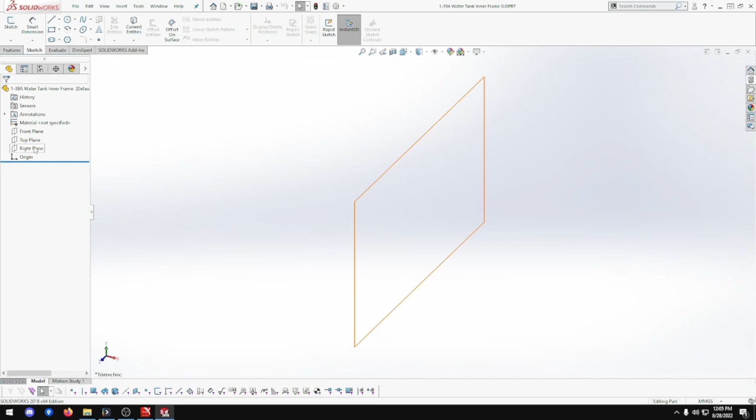So let's do right. There we want, start there, do that one. We're just going to do one first, then we'll mirror the rest. That's going to be 12.

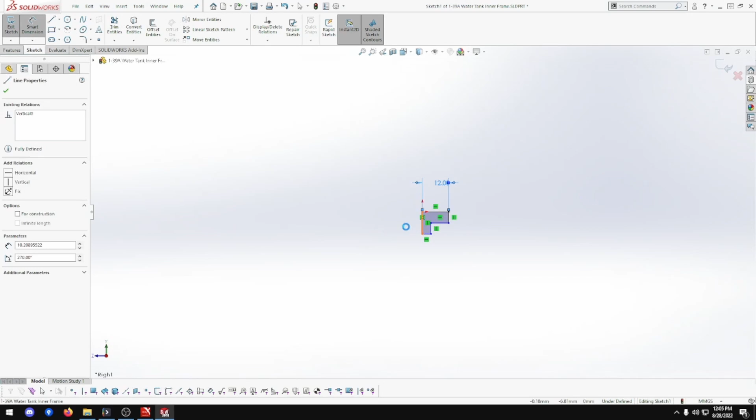By 12. Let's zoom in a bit. This is going to be 3 thick, and that's going to be 3 thick. Okay, that's cool. Now we want to mirror entities.

Let's do the same. Oh, that's terrible. Join those two together, beautiful. And again, this one. And this one.

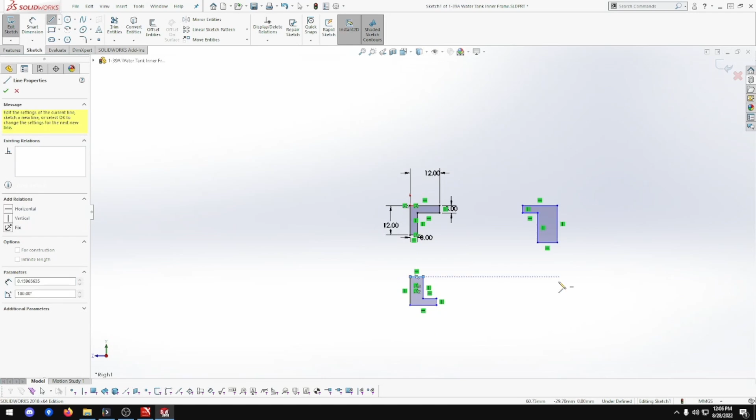Again, there's so many ways you can do this. If you really want to, you can do the pieces individually, then join them together. That works fine too, but I'm just going to do this as one piece.

So now we want that one, and that dot. Those 2 points are going to be horizontal. These 2 points here are going to be vertical. These 2 are going to be vertical, and these 2 are going to be horizontal.

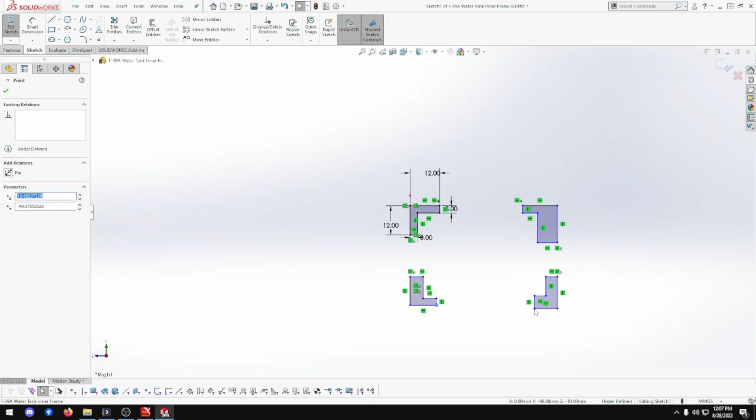Okay, let's just zoom in a bit, make it easier. There we go. Tighten this up a little bit, just makes it a bit easier. Move that 3 out there, beautiful. Okay, just to make it less measurements. There we go. So that's locked that one in now.

That's gonna lock that one in, beautiful. Let's do this one. Won't lock it in, but I just need to measure 1 spot, and that'll be done. There we go. Okay, so actually hold on, we do that one, there we go, and this one, and this one, there we go.

Let's measure on the opposite side, this one, and see what areas we need to adjust. 3, that is 12, and that is 12. Okay, so we still need measurements across. That's fine. So maybe that's got to lock in.

Oh, there was what we missed. And that one there, beautiful. Let's lock it in. Yes, I still need to move that way. That's fine. Lock those 2 in. That's going to be vertical. Always say the wrong one.

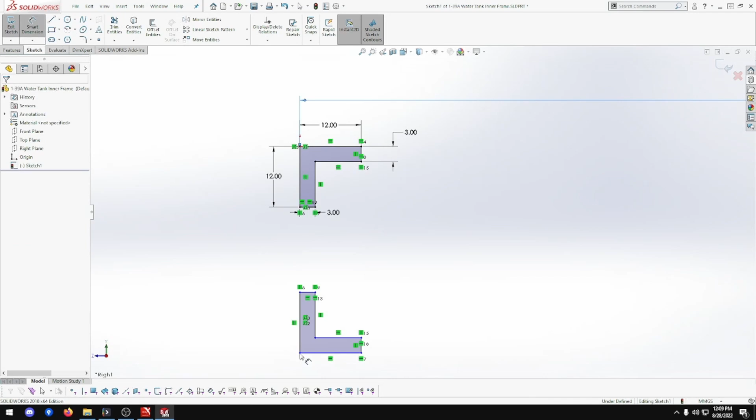Try again. Yeah, I had 1 point highlighted still, so that's why I went like that. 250. Yeah, smart dimension, yeah, everything should be.

Oop, wrong way. So that's all black, so that's locked in. That's all black, that's locked in. That's all black, that's locked in. Excellent. Okay, don't worry about the mess of those lines, you won't see them later.

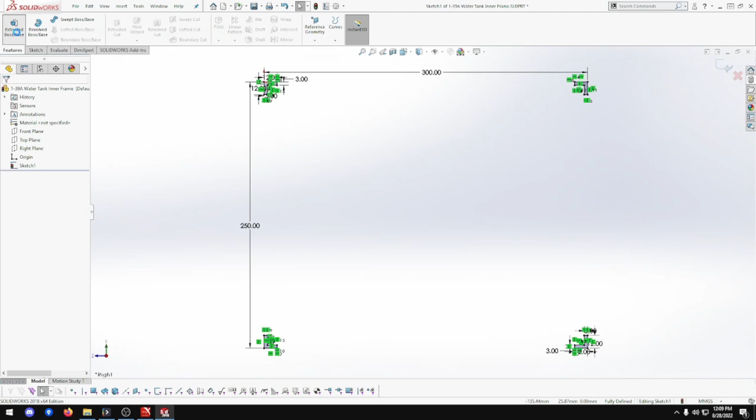So now we want feature, extrude, mid-plane, and that's going to be a total of 585. And done. There you go. That's our first 4 bars.

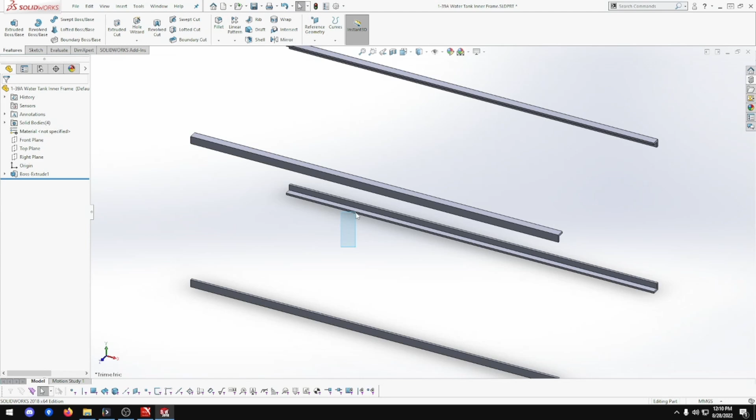Now we need to build one at this end. We need to build one at this end. So I'm just thinking - so yeah, if we build 4, 2 there, it's exactly the same as what we've done, but going that way, and that should be everything done then. So let me, what am I, normal to, that's what I'm after.

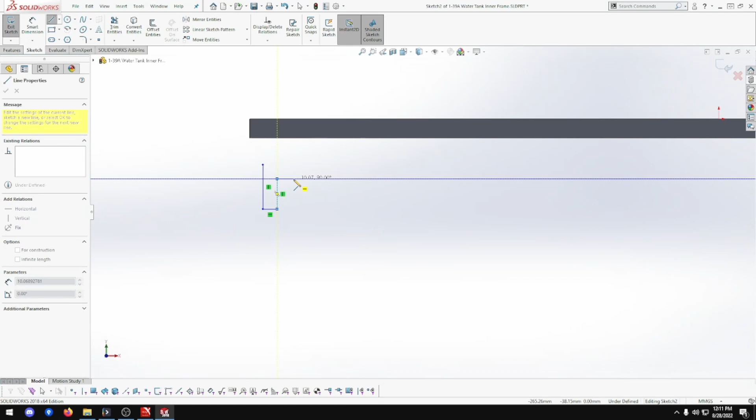So again, let's do the L shape. I'm going to do it on the front plane. Yeah, front plane, going to be there. Let's just do the L shapes again, not connecting anything, not really lined up with anything. Let's do that one, I'll throw that out in a minute.

Oh, didn't join up, I hate when it does that. Merge points, there we go. Beautiful. What are they? Makes them horizontal, make that one horizontal. There we go. It's bugging me, that one.

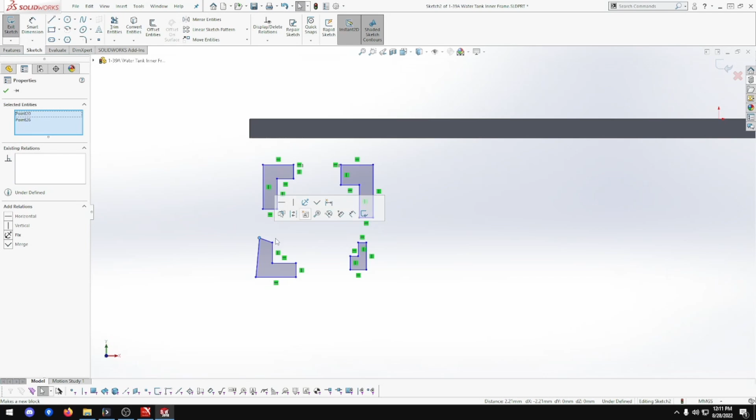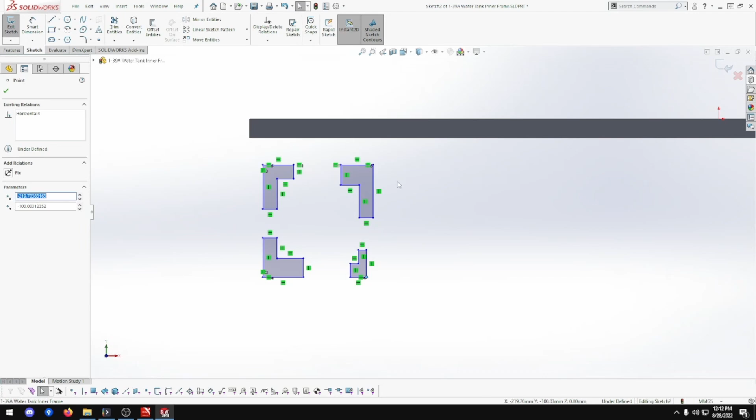Man, everything went wrong with that one. Merge point, horizontal, and vertical. There we go. Okay, so this point and this point will be vertical. This point and this point will be horizontal. Do these two horizontal, no particular order. And that one will be vertical. There we go. Okay, let me just zoom in on that.

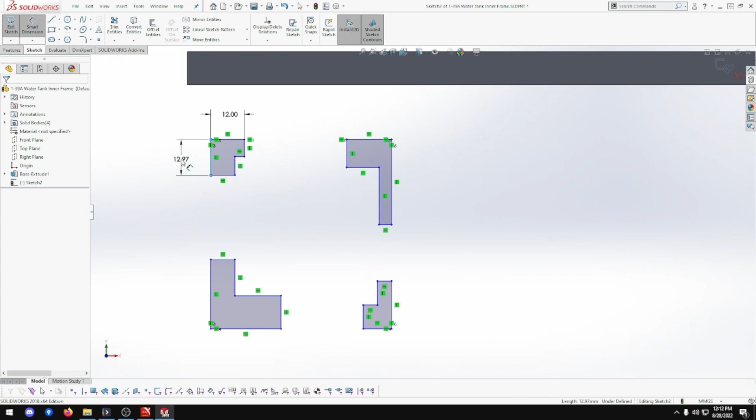We want that's going to be 12. That's going to be 12. Let me just knock that one out. I like that one. Let me shrink that down a bit. Let's try that again. 12. There we go, because it moved the wrong spot down and went below that. Okay, 12, that's fine. 12.

3. 3. 3. And 3. Okay, now this point and this point is going to match up there.

Now I clicked outside to unhighlight everything, so that way I know I don't have extra things selected. Those two there, beautiful, that one and that one there. Now if you click on the one up here, it's going to unhighlight all the ones there, so I'm using the shift key to highlight more than one. So select one, press shift, select that one, release, and it's going to be horizontal, horizontal, vertical. I did that one, didn't I?

It moves all around. Oop, I missed one, that's why I was moving that around. That one and that one will go to horizontal. There we go. Oh, try again. There we go. Beautiful. Now that was, what was it?

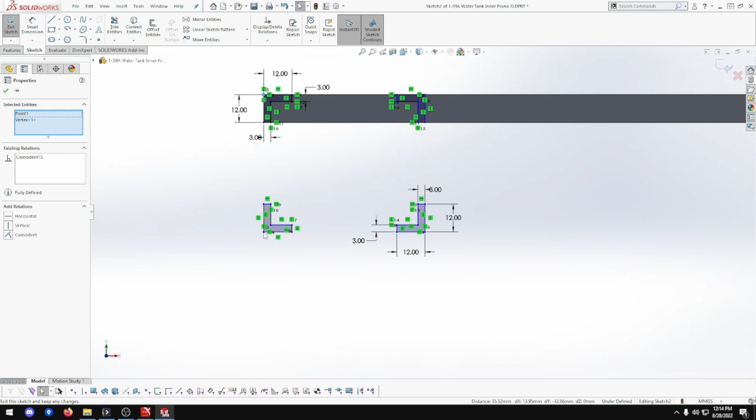300. So if we go, well technically you can measure, or we can go this point and this point, merge. This point, merge. This point to this point, merge. Now technically that should be up there.

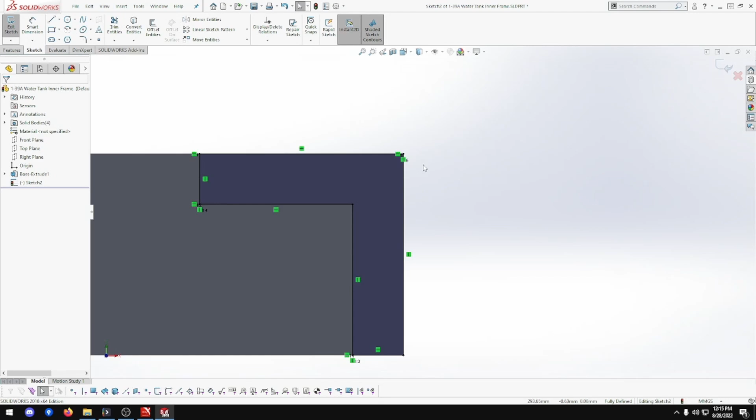Perfect, okay, we don't need it. Is it? Oh yeah, this. I thought I saw two dots there. This is why it rendered in. So okay, so that's good. So now we should be able to. Oh, front face, okay, I was thinking front face in the middle is front. That's fine, no big deal. Does not change anything, just changes how you do stuff.

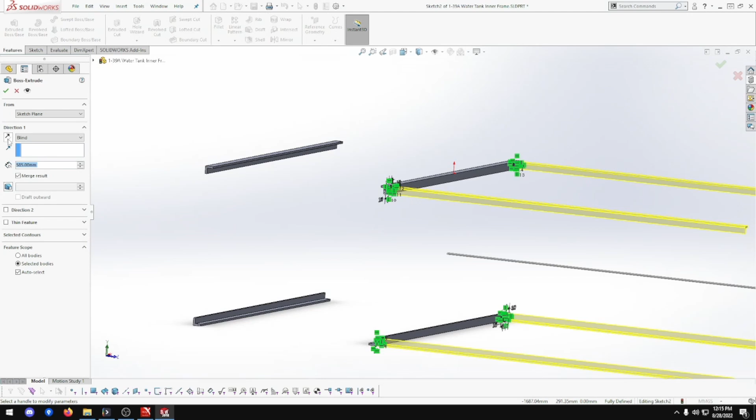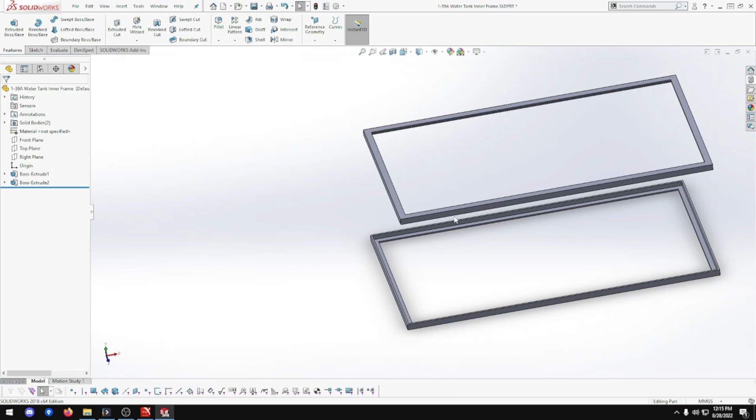So extrude, so we will flip that around, and that's going to be, what did I say, 300? 300, and done. Or you could merge up to the next point. There you go, look at that. There's no joins there, so that joined up perfectly. But it didn't join properly, you see a line there. So now we need build from above. So let me normalize that one. Beautiful.

Sketch. Again, I'm going to do the same thing. Now, if I made this, I could just make one, do a correct length, resave it, re-length it, resave, re-length it, then assemble it with mates and that. You can do that way too. That way you've got individual pieces, they're easy to change. That way if you do change something later on, you've got to change one piece and it changes through. So I'm just doing this way, I just want one piece.

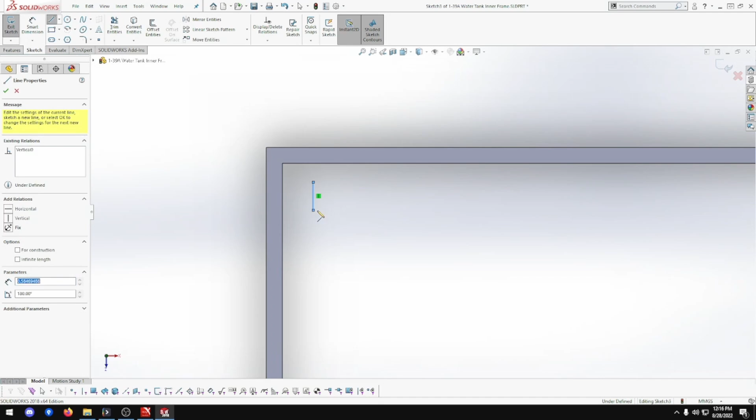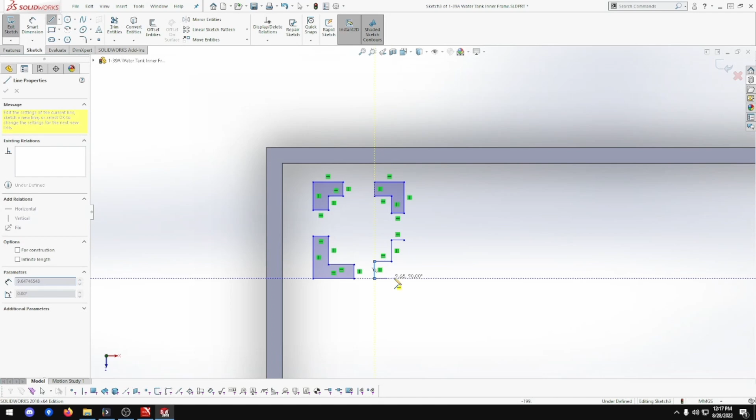Okay, so line. Oh, did not join, join up, thank you. Let's do the L shape, face all different directions. There we go, okay, yeah, line, thank you. So these two, you can do those two. You do the out corner points, it doesn't really matter. That's vertical, sorry, that's horizontal, so it works out the same.

That's going to be there, and that's going to be there, and that one. These weren't pretty much lined up because I was clicking on it when it showed the line, but that one didn't. There you go, now let's go across. So it's virtually 1, 2, 3, 4, 5, 6 connections each way, and that should be enough to do it properly.

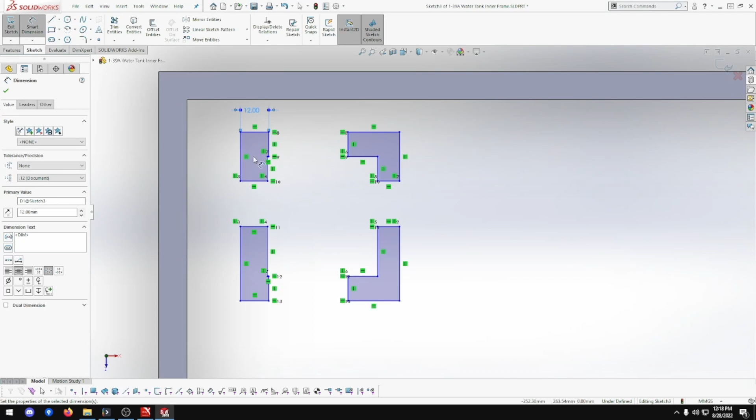That's that one, beautiful. That one. That one, and that one. There we go, okay, smart dimension. 12. 12. 3. Very small one, zoom right in. 3. There we go, cool. Okay, now this one here.

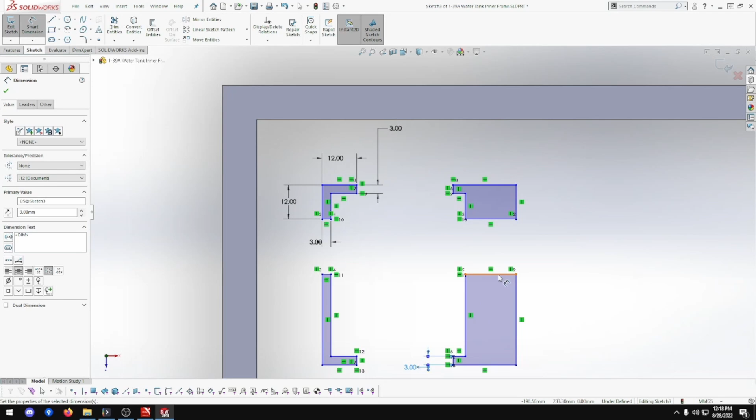Let's do this one first. 3. 3, see it's doing all of them the correct way. 12, like it's making them correct. And 12. So that should be all. Yep, so I can move around but nothing stretches, so that's correct.

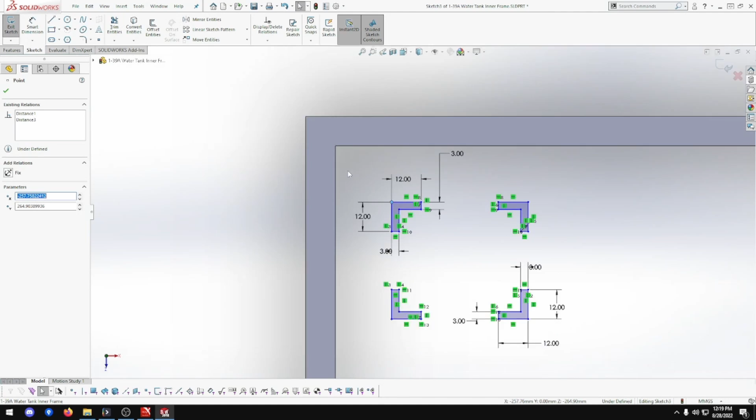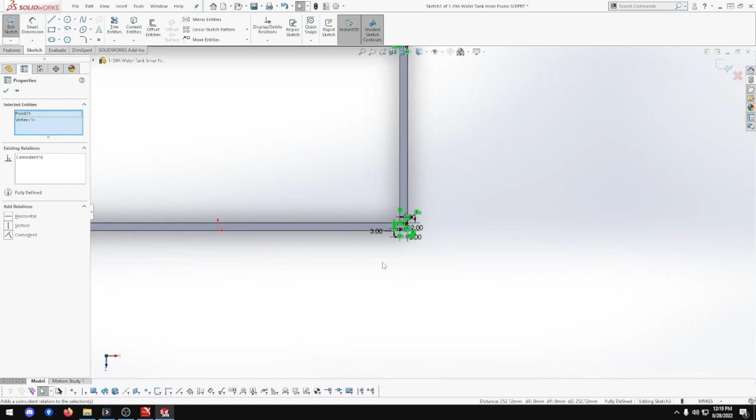Now we'll go point there, point there, and that's going to be merged. Beautiful. Now again, you can measure the distance on this as well, but this is just easier this way. Merge that one. We do this one, should lock them all in then. And merge, this one here, it should not, it's all black, so it's locked in that way, so that's cool.

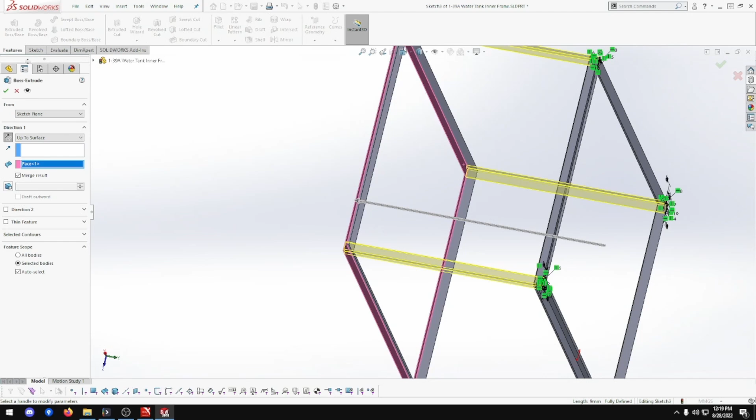There's our box done. So that's part 1-39A water tank inner frame done.